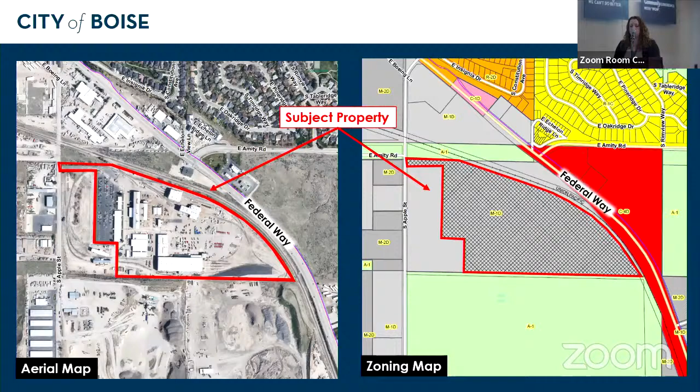First, we're going to hear from staff, Jesse Lau. Mr. Chair, Commissioners, good evening. The item before you is SUB 23-63. This is a preliminary plat for 1 common and 10 buildable lots located at 4600 Apple Street on approximately 36.74 acres in an M1D zone.

The original application was for 13 buildable lots. However, the applicant has reduced this to 10 lots as reflected in the late correspondence memo. The applicant is proposing to keep the existing uses and add existing lots to the site. The proposal maintains the existing access point onto Apple Street and constructs Fire Rail Street as a private gated road.

While private streets are usually discouraged, there's no potential for cross-access or street extension to the north or east due to the railroad, and to the south due to the quarry. ACHD has also conditioned this to be a private street. One condition of approval will require the installation of sidewalk along the entire length of the private road. The applicant is opposed to this condition, which is why we're hearing this application this evening.

While the subdivision design standards do not require curb, gutter, or sidewalk for private roads in industrial developments, this can be required by City Council, and the comprehensive plan does encourage greater pedestrian connectivity throughout the city. Additionally, any subsequent development will require sidewalks through a design review approval. Sidewalks are included as that condition of approval for the subdivision in order to develop a cohesive pedestrian network rather than a piece-by-piece network during subsequent review applications.

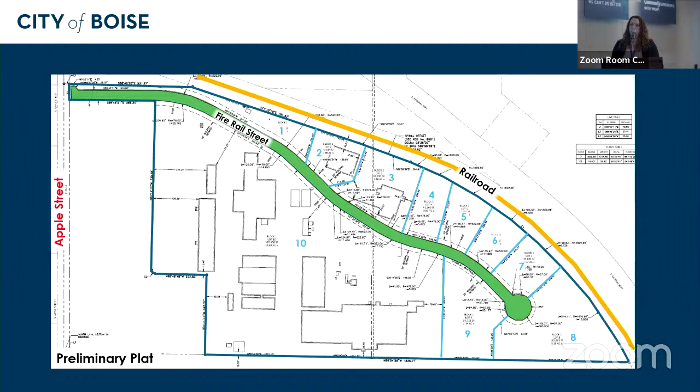As conditioned, the proposal meets all of the requirements of the development code. In conclusion, the planning team recommends approval, and I'm happy to answer any questions.

Okay, thank you, Jesse. Next we'll hear from the applicant. Please start with your name and address for the record, and we'll give you 10 minutes to do it. Thank you, Commissioners. My name is Connor Lindstrom, KM Engineering, 5725 North Discovery Way, Boise, Idaho, 83713.

I'd like to thank Jesse first off for her presentation. I think she summed it up overall, but I'm going to dive in a little further and give you more context. So as you can see, Fire Rail Subdivision is what's proposed. I'm with KM Engineering, a planner with them, and we're working on entitlements, surveying, and engineering.

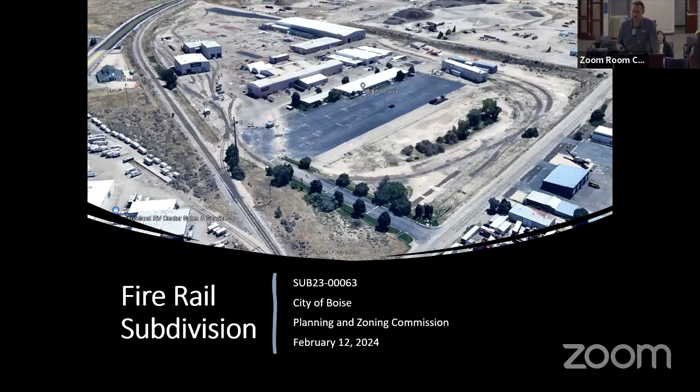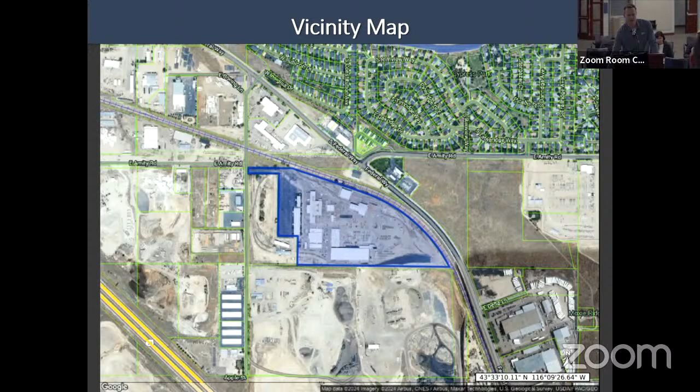We believe that this will be a seamless transition for the area. It's industrial in the future land use map. We're not changing the zoning or anything like that, just dividing the property to provide future industrial users a place to locate on those lots. As you can see, lot 10 is much larger.

It's just over 20 acres. That'll encompass the existing fire truck manufacturer that operates on the property, BME Fire Trucks, which manufactures on site. Those existing buildings will remain within lot number 10. There are two buildings to the north, more along the northern part of the property, and those will be within their own lots as well.

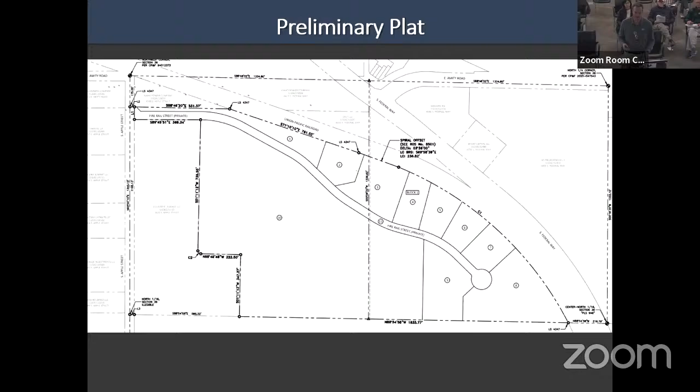So we have a private road that's going to go through, providing frontage and access for each of the lots. Like Jesse said, we did have originally 13 lots, but to get rid of any cross-access issues, we combined some of those lots to the south into that larger lot 10.

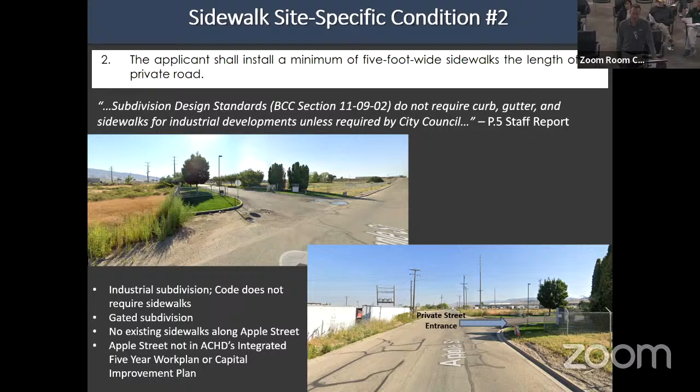So we don't foresee much pedestrian traffic going through this area, or really connecting to anywhere else, because this is not within ACHD's integrated 5-year work plan or within their CIP to require sidewalks along Apple Street. The nearest sidewalk, as the crow flies, is just over 1,000 feet away along Federal Way. So like I mentioned, not much room for connectivity.

Another thing to mention, and I know Jesse touched on this, is as future users come forward, they'll be under the new code, so design review would most likely require improvements at that time. We don't want to put in the sidewalk now, and then as those future users come in, depending on if they buy 1 lot or 2 lots, they could just have to rip out the sidewalk to put in a new curb cut if it doesn't align with their use and their needs.

We also have the rail line that goes through there, so depending on how that rail line touches their property, they could have to recreate the site for their needs, specific to what those industrial uses could be. And like I said, they will require approvals at that time. But we'd like to specifically request that condition of approval be removed. Other than that, we don't have any other concerns at this time, and I'll stand for any questions.

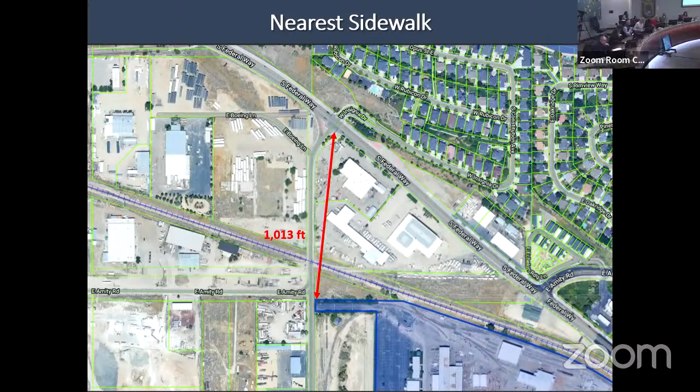Okay, thank you, Mr. Lindstrom. Appreciate that. First, we'll check in to see if anyone from the Southeast Neighborhood Association is present. I don't think Mr. Berg is with us. Crystal, still no one online? Okay, all right, we'll go ahead and open it up for questions then by the commission.

Mr. Chairman, Commissioner Daly, I have a line of questioning if I may. Mr. Lindstrom, let me start with this. This is a proposed 2,000-foot, roughly, long street, right? And this can be a question for staff as well. It looks to me, according to the site plans, that it's a 40-foot, just about curb to curb, curb face to curb face, give or take. And it looks to me like the existing street section there is a tad bit wider. Can we confirm at the very least that it's 40 feet wide face to face?

And you're talking about the existing access point onto Apple Street. How wide is that currently? I want to make sure first and foremost that the extension of the existing road, that's the bulk of the distance here. Oh, gotcha, from face to face of the curb, looks to me it's about 40 feet. I think that's, can we agree on that? Yeah, okay. My question to you then, Mr. Lindstrom, is that there's nothing, I don't believe there's no road there that's there now.

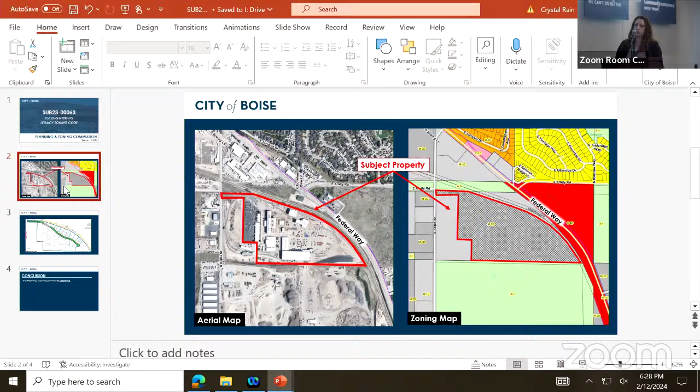Thank you. Yeah, Jesse is right. This is currently owned by the same property owner. It's vacant property that they're leaving open at this time for future development, but it's not included in this application. That's the most I can give you. Okay, that's great, appreciate that. Any other questions, gang? All right, great, thank you very much.

If there's anybody that would like to testify on this item, we'll open up the public hearing. Anybody present tonight want to testify? No takers. We have one person online who wanted to testify online - getting a no from staff. So we'll go ahead and close the public hearing.

At this point, the applicant typically gets 5 minutes for rebuttal of anything stated during testimony. We didn't have any testimony, so you can certainly yield that time if you'd like.

Yeah, Commissioner Schaefer, thank you. We don't really have much else to say, but just wanted to note that the gate is existing. It is paved through that area right now. It is an operating site, and so currently they have a lack of pedestrian access as it is. There are folks that work there on site, and it's just not been brought up as a need at this time. So our thoughts are we don't see this changing in the future, but who knows. That's all I have to say.

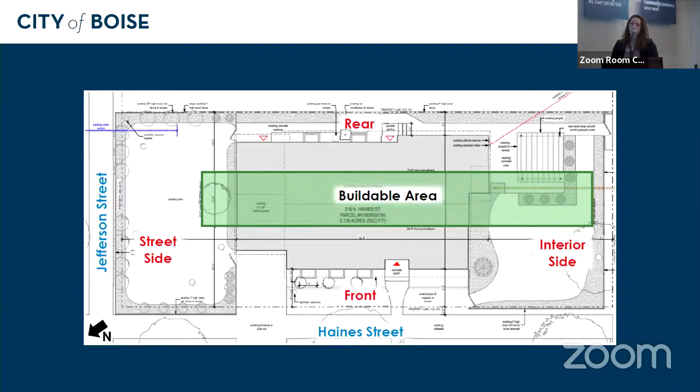The orientation of the home is irregular in that the house fronts Haines Street rather than Jefferson Street, which places the alley at the side yard rather than the rear. The orientation makes the buildable area quite narrow as shown on the screen, and the existing home is built within the front and rear setbacks.

The planning team has found 3 of the 4 variance requests meet the criteria for hardship or exceptional circumstance. The variances to encroach into the front setback for the egress window well and rear setback for the steps present life and safety as well as access concerns. The egress window is required for a bedroom, and the proposed steps are replacing the existing steps at the same distance from the property line with a slightly larger landing.

The orientation of the home creates an exceptional circumstance to allow the fence to exceed the maximum height in the front yard. If the home were oriented to face Jefferson Street, the proposed fence would be allowed as proposed within this side yard setback and would be consistent with other homes in the neighborhood. Additionally, the applicant utilizes this area as their private open space, and they are also accounting for the clear vision triangle on the proposed plans.

The final variance request is to allow for an in-ground hot tub in the front setback. The planning team finds that this request does not meet the criteria for hardship or exceptional circumstance. While the buildable area of the lot is narrow, the development code allows in-ground pools and hot tubs to occupy any rear or interior side yard area as outlined in green on the screen. While their proposed variances are impacted by the orientation of the home, the allowable area for the hot tub does not change with the home's orientation.

The applicant has also cited the existing pergola as a hardship. However, it is an accessory structure that can be removed or relocated to accommodate the hot tub. The applicant also has options to reduce the size of the hot tub or relocate it within the allowable area. Finally, while other requests involve life and safety issues or allow for development that is characteristic of the neighborhood, this request does not. In conclusion, the planning team recommends approval of the variances for the egress window, rear stairs, and increase in fence height, but recommends denial of the variance request to allow for the in-ground hot tub in the front setback, and I'm happy to answer any questions.

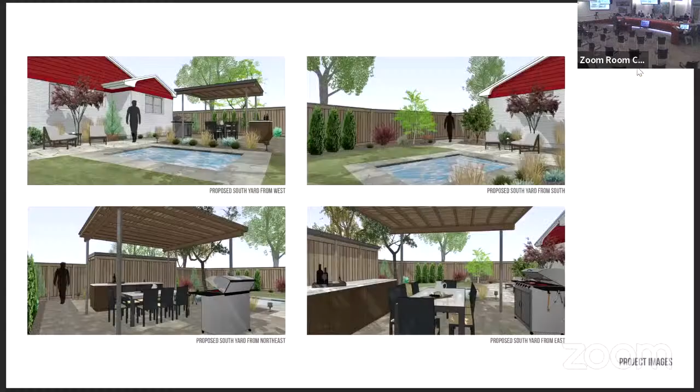Hey, Scott. Chair and Commissioners, my name is Scott Wybar. I live at 442 West Thatcher Street in Boise, 83702.

So I think we have a different presentation. There's a clicker right next to the podium. And Scott, will 10 minutes do it for you? Yeah, it should be fine. Great, thanks. Thank you.

So I think Jesse did a pretty good job of explaining the situation, but I might just add a few details. So this is the existing home as seen from Haines Street. This is the west side of the property.

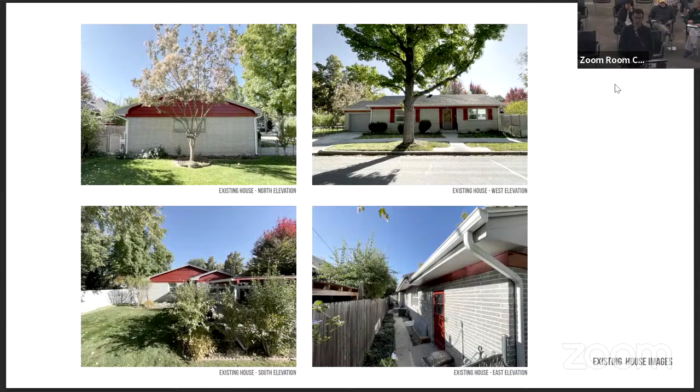A few other images of the property. You can see that the house is really close to Haines. Like we mentioned, that is the long side of the lot. Normally, the houses in this neighborhood would face the short side, so Jefferson to the north. And on the rear, the house is about 5 feet from the rear property line, so also not within the 15-foot setback that would be applied in this case.

These are some other images of the items in question. Staff has recommended approval of the fence, the landing, and the window well, so I won't talk too much about those. But I will point out that existing pergola and the access from the house to the alley just behind.

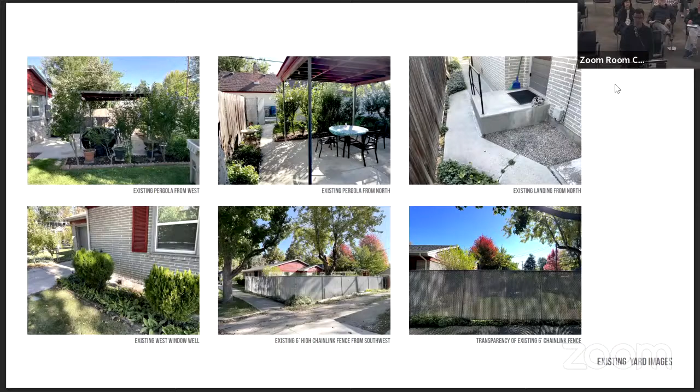In that middle photo on top, you can see that the natural path to the alley is straight along the side of that pergola. The pergola itself is about 6 feet from the property line, but would not conform to the current zoning. A structure like that would need to be 9 feet from that rear property line. So removing the pergola would, in essence, mean you would have to rebuild it further away from that rear property line.

So this is a similar diagram to what Jesse had, just pointing out that there's a very narrow strip where you can actually build anything on this lot.

To give a little bit more context, originally part of the project scope was to increase the garage size to provide for some storage. You can barely get in and out of the car inside that garage. That plan was scrapped. Part of that, we are proposing a small storage shed to make up for some of that storage space.

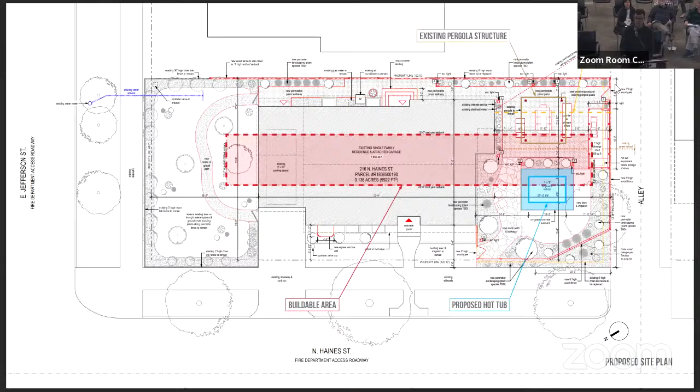But the big item is just to be able to physically make use of that rear yard, to remove the pergola. To keep the pergola is really the only option unless you want to push it to that inside the yellow line there. And if you did that, there would be almost no buildable area left for that hot tub as shown in blue.

And we've actually shown a few options, so basically where could you potentially put that. Staff points out that there's plenty of room within that green box on her slide. But none of those places are actually very realistic at all. It's essentially anything that you put along towards the back would cut access to the alley. And any other position is basically going to put the hot tub directly against the existing pergola.

And that's something that we would really like to avoid, just because it would put it so close to basically an eating, living, gathering area where there's potential for a fall if someone steps back into the hot tub. So what we have tried to do is to provide a barrier between the gathering space and that hot tub. You can see there's sort of a landscaping element.

So in order to do that, our feeling is that it is reasonable, given the orientation of this lot, the hardship that does exist, that hot tub encroach into that front yard - front yard kind of in quotes. And that is 4 feet 8 inches into that front area. So that rear yard, what has been historically used as a rear yard since 1958, will have the new fence. It's a private space, and we don't see that there's anything that's not in compliance with the general East End neighborhood plan or the general comprehensive plan.

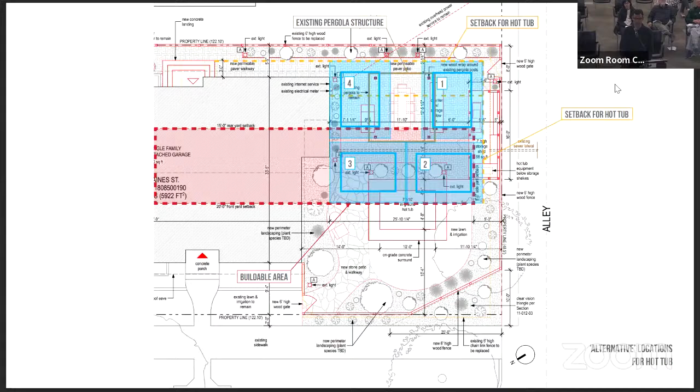So anyway, that diagram is just to show the difficulty of actually finding a place to fit that hot tub. Here are a few images just to show the new fence, the vision triangle, and several images of what the intention is for that rear yard, keeping that existing pergola. So I think with that, I can just open it up to any questions you might have.

Okay, thank you, Scott. First, I got to check and see if we have anyone from the Neighborhood Association. Staff, do we know if Ms. Montoto is going to join us from the East End Neighborhood Association? Nope. Okay, well, let's go ahead right along to questions then.

Mr. Chair. Commissioner Moore, please. So I think, Jesse, I think it was in your staff report, but can you confirm - the north side street, if that was the front yard or the front yard setback, and then Haines was the side yard, you still wouldn't be able to put the hot tub right there because it's a street side setback. Is that correct?

Mr. Chair, Commissioners, that is correct. That green area that was outlined in the packet, I can show on the screen here as well.

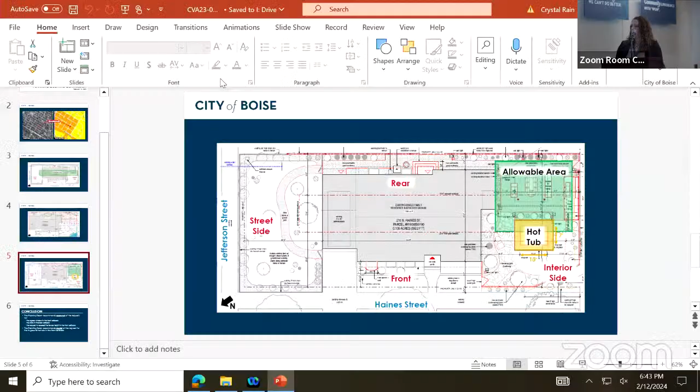That would be the only allowable area for the in-ground hot tub, regardless of the orientation of the home.

Mr. Chair: And so if I understand correctly, that's not really altered by the alley side being the rear yard, because there's still that 5-foot setback between where you're allowed to put the hot tub and the rear yard and the interior side yard, right? Staff: Mr. Chair, Commissioners, the Development Code allows any in-ground hot tub or pool to be within 3 feet of a rear or side yard property line. Thank you.

Commissioner Blanchard: Jesse, would we regulate the placement of an above ground, or is this just in-ground we're talking about here? Staff: Mr. Chair, Commissioners, the Development Code only regulates the in-ground. Thank you.

Commissioner Daly: I want to make sure the timeline of this is understood, Jesse. So this house was built, I think you said 1958 - I thought I saw an earlier date, maybe 53 or something like that. Do you remember? Staff: That could be correct. Commissioner Daly: So the better part of 70 years, give or take, it was built and was like this.

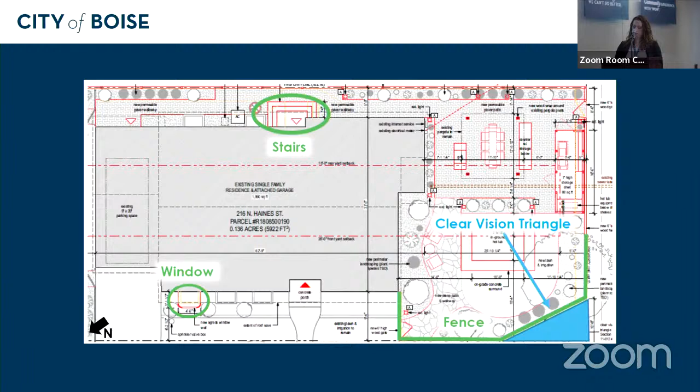Staff: Mr. Chair, Commissioners, if I could put up the exhibit - the green area on the screen is the allowable area for the tub. Currently, the hot tub is proposed as a 70 square foot tub with an apron. One option could be to reduce the size to fit into that area with the pergola. As the pergola is an accessory structure, there's an option to relocate it and accommodate both. There's also an option, as Commissioner Blanchard pointed out, to have an above ground hot tub, which would not be an issue anywhere in this yard area.

Chair: Thank you, Jesse. While we're on this subject - the pergola - Scott, the applicant, implied that it's non-conforming per code now, set too close to the property line. Is that correct? Is the city in agreement with that statement? Staff: Mr. Chair, Commissioners, I believe the allowable setback for a pergola for the rear setback under the code is 9 feet, and I think it's closer to 6 right now.

Chair: Okay, so we're on the same page there, Scott. Applicant: That's correct. Chair: Great. So Jesse, and I'll follow up with the applicant in a second, but the pergola structure, if it were to move, it has to be 9 feet from the west property line, which is the top of the page now, right?

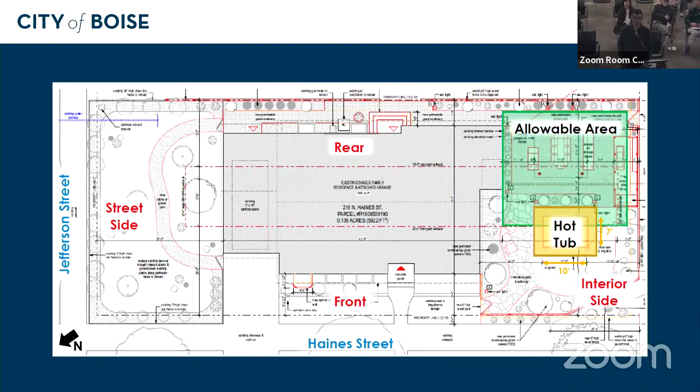I think the reason why is because if we take it down and build a new one, we have to move it. So it moves even closer to the middle of the yard, taking up even more space we could potentially use for the hot tub. So it's basically condensing everything even more. You can imagine it has to move 4 feet further towards the bottom of the page, getting it even closer to the hot tub, which we're trying to avoid.

Right, so I guess where I'm going with it is, they both can move around, right? You've got a square for the pergola and a square for the hot tub. Have you explored different configurations of moving them both? Yes, we have done that. And I think what you'll find is that between the house and the alley property line, there is not enough space for those two items to coexist. It basically just puts one on top of the other, right next to the house and right next to the alley setback, and just changes the configuration in the other direction. You still have the issue where the hot tub is directly next to the gathering space, and it also makes it difficult to have access from the east side of the yard to the west side of the yard.

So given the circumstances, the question is, is there a variance for the setbacks for the hot tub? It isn't, I mean, we can't really fit it in that space. I think staff has said well, you can find a way, and we're trying to say there's not a practical solution to that. We're already asking for a variance for this difficult orientation.

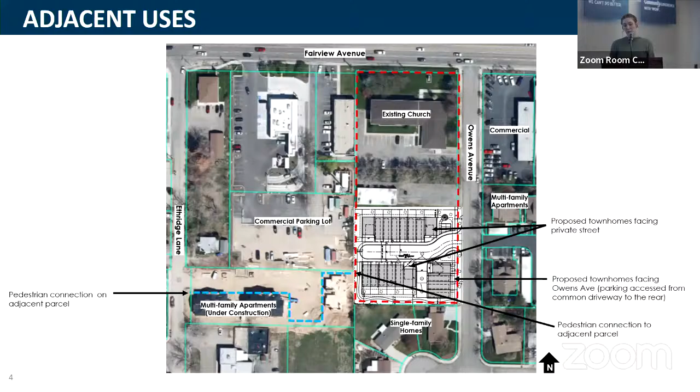All perimeter setback requirements are met or exceeded, and the orientation of the proposed townhomes are compatible with the adjacent uses, including the existing single-family homes to the south. Each of the proposed townhomes will have 2 off-street parking spaces located within attached garages, with most utilizing a tandem parking arrangement. In conclusion, the planning team recommends approval, and I'll stand for any questions.

Okay, thank you, Sabrina. Next, we'll hear from the applicant.

Where you been, Ben? It's been like, what, 2-3 months? It has been, yeah. Well, happy 2024 to you. Yeah, happy 2024 to everyone as well. Welcome back. So, Ben Semple, Rodney Evans and Partners, 1450 West Bannock Street, Boise 83702.

Sabrina has really worked with myself and the applicant team. I think that you guys have seen this before on this property, or at least there was a submittal made. It was much more modern, and the entry drives were much different orientation. So I was brought onto the team, kind of looked at this again, really working with ACHD to find the access point that's appropriate and how to get as many units on here as the client could be able to develop, while still being well under the density allowed in that C2 zone.

We're in agreement with the conditions of approval and the staff report, as well as the ACHD staff report. It's nice to see that we can keep some of the existing sidewalk along Fairview, just for purposes of sustainability.

Looking at some of the items from the agency comments, I just want to confirm these are 30-foot height maximum to the eave. So while it does accommodate aerial access for fire, it won't be required for these. We have an on-site turnaround that fire has approved, and it also works for solid waste. We will be reorienting that solid waste enclosure a little bit to comply with their comment on that.

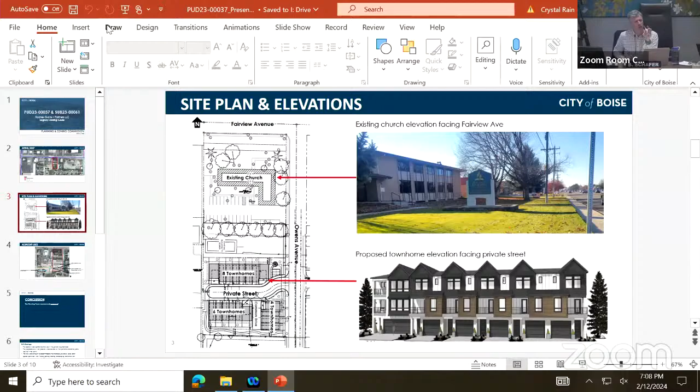I'll start then. So Ben, you alluded to... Sabrina, could you pull up just the site plan for reference? I think I know what's going on, but I'm just a little curious, Ben. So you mentioned the church and the maintenance facility. Is the maintenance facility that little building? Yeah, right there, Mr. Chair.

So the existing church building fronts on Fairview there. Then there's a very large landscape buffer between their parking lot, with some really nice mature sycamores, and then a maintenance building. They have their dumpster back there, but that's all asphalt right now, and very minimally used. I would say once a giant field that they have to mow isn't there, they'll probably use it even less.

But the church owns everything north of you. Correct, essentially. Okay, yes, great. All right, thanks.

Mr. Chair, Commissioner Mooney. So looking at the picture we've got up right now, the overhead power lines are why the detached sidewalks aren't conditioned. Is that accurate for staff? Mr. Chair, Commissioner Mooney, are you talking about the frontage on Fairview Avenue? Yes. Yes, the overhead power lines are a significant reason that wasn't suggested by staff with this application.

Follow up, Mr. Chair. So for staff, the ACHD report indicates that the picture we're looking at there will be 7 lanes. Is that the way I understand it in the CIP, ACHD 5-year work plan? Mr. Chair, Commissioner Mooney, I believe that's correct.

Is there anything we would normally condition for an applicant like this in the interim between now and that CIP project? Mr. Chair, Commissioner, if there were no existing street improvements, then most likely we would condition that, knowing there's likely to be a larger project that comes in down the line. I would say typically no. Mr. Chair, last question: how about the VRT stop?

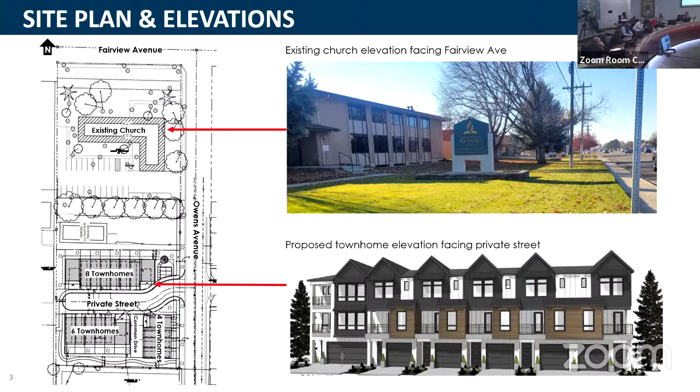Mr. Chair, Commissioner Moore. So that pedestrian connection from the adjacent parcel to the west, where does it go? Does it just connect Etheridge with Owens Avenue? Is that the intent? Mr. Chair, Commissioner Moore, that's the intent, is to provide pedestrian connection between Owens Avenue and Etheridge Lane. It does also provide an alternative route for folks to get down to Florence Park further to the south. Okay, gotcha. So there's a connection to Florence from the end of Etheridge. That's correct.

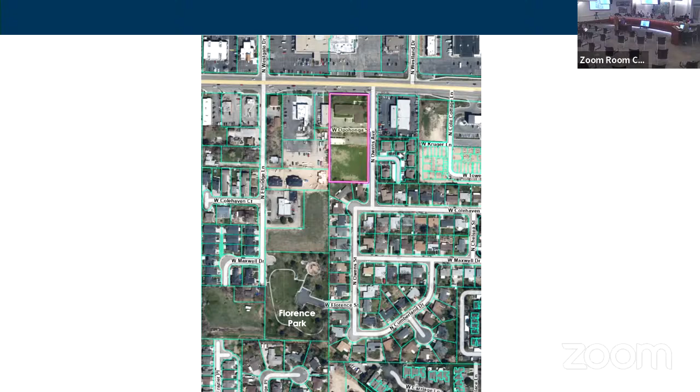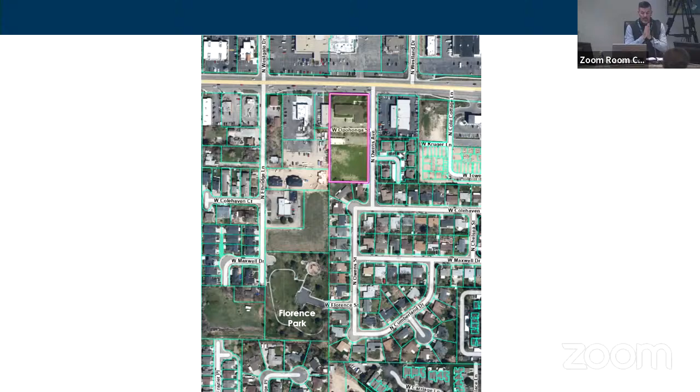Mr. Chairman, I just have one quick question if I can, Commissioner Taylor. I'm having a heck of a time seeing if this is accurate or not. I'm seeing different things on the plat disc maps and also on the images that you've described. I can't figure this out, so I need some help. I see that there is sidewalk that's going to be built by you, that in some instances looks like it comes to the back corner near the first lot. In the upper right of that image, it looks to me like the sidewalk terminates there. Is that correct? Mr. Chair, Commissioner Damley, that is what we had shown here.

Mr. Chair, Commissioner Mooney. So the pedestrian easement and pedestrian cross access, east-west down there at the bottom, south end of the parcel, how did we get there? Was the west parcel that we're connecting to with this applicant conditioned previously, or did we just luck into that? Mr. Chair, Commissioner Mooney, I actually reviewed the application on the adjacent parcel as well. That was a condition of approval on their end too. Excellent, thank you.

Ben, I see. Okay, Ben, got a couple houses to your south, correct? Mr. Chair, yes, that's correct.

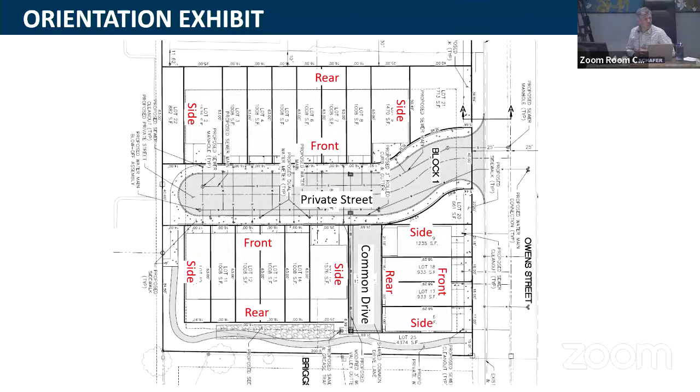Can you walk us through, I mean, you've got a robust landscape plan in that buffer there. I don't know if we have that in the slideshow. Yeah, Mr. Sweet, Chair, so the home immediately to the south that's along Owens, fronts on Owens. So their side setback is their north property line. Gotcha. And so the south would be the side property line for this. It could have been a little closer. We felt like because of the rest of the landscape buffer that's along the western portion of the southern boundary, that it made sense to push that further from the property line.

Again, really trying to protect the privacy there, knowing that there are existing yards being used. A lot of the tree locations are coordinated with what I've seen in the field, to try to fill some gaps. And then once you get to the home on the south of the western corner of this property, their backyard is the north property line, so that's why we pushed those townhomes further north. Those also have private yards in the backyards, as do the ones along the north side. So really that southern boundary was meant to be very passive, kind of a walking trail only, not people hanging out in that space, because we've got that northeast corner as the usable open space, really trying to keep activity away from the residences to the south.

We've also committed to not putting balconies on the south side of those units. Or if they're on the east or west, they're screened with a wall or set inside the architecture so that there aren't any views out of those upper levels to the residents to the south.